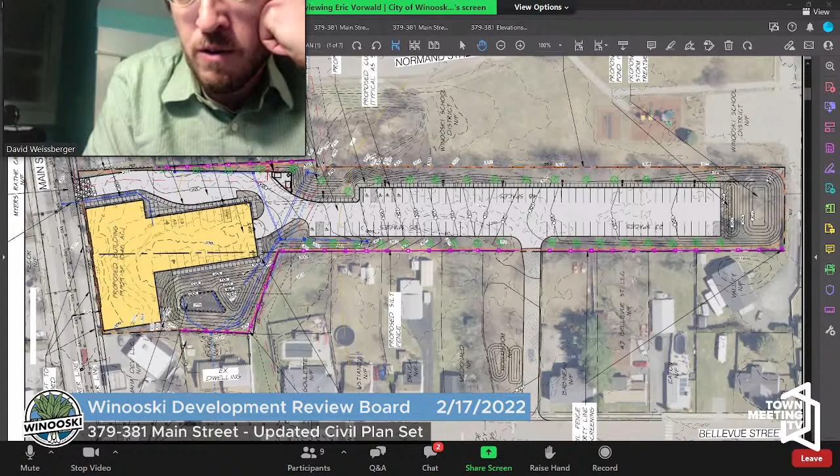To be honest, I don't recall if we put a specific detail, but it's very explicit on the plans, the call outs for a 6 foot high vinyl fence. My understanding is it'd be a 6 foot high white vinyl fence, just like you could get at Home Depot or any specialty store that sells fencing, or have it installed, but that's the intention. I believe along that southern property line our only requirement is a fence, not a wall.

Is that correct, Eric? Correct. Yeah, so that's our intention, 6 foot high white vinyl fence.

If there's any doubt in anybody's mind, we could certainly put a detail on one of the detail sheets and call out more specific if the board so insists. We'd be happy to have that conversation with you folks tonight if you find that helpful to satisfy all the neighbors' concerns.

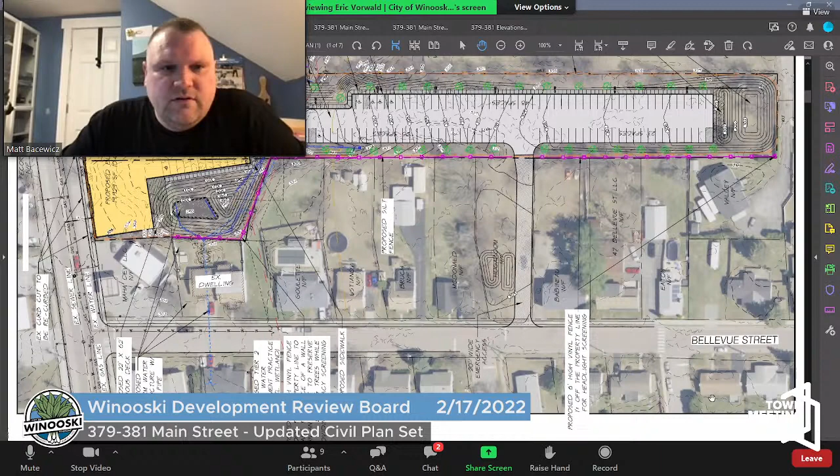Did you say you had something on paper that might offer up a better visual representation of what we're talking about? I brought views from the corridor, and I think we could hold them up to the camera. If possible, I'd like to see if we can get a copy of those entered.

Zoom in. Just hang out there. He can zoom in his camera. This camera here. You just stay where you are, Carl. Okay, I'll stay right here. You just hold him up. Okay, so this is the first excerpt that I brought.

It's really just a Google Earth image from the street perspective. I don't know if you guys, I mean, I can get closer to the camera too. Actually, let me stop my share as well, that might help. I'm going to leave these with Eric.

And what are we looking at there? The mature trees? Yes. I don't know if you can zoom in more or I can get closer, but this is really tough, this is not going to help. Okay, I can see it. So all those trees, will they all be cut down?

This is the street view for, I believe it's 53, to the right you can see the garage in the back. In perspective on the plan, we could go back and point to the plan, but visualize what that looks like, the garage in the background there.

Then we'll show you where it is on the map. So that's that one, and then we're gonna show the other side of the house right next to it, which is that one. That's the street view looking from Bellevue towards what will be the fence behind that garage, right here. On the plan view, Eric, if you would bring that back up, I'm pretty sure you can point to it, but I can guide you where those pictures show the representation from the street view.

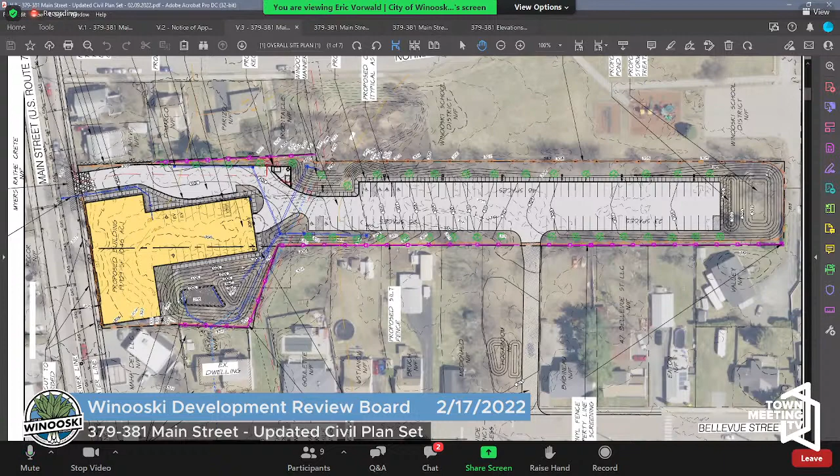For that particular property, even though he was the one concerned, I think you're not gonna see much. But for all the other properties that don't have structures that close to the property line, I think the fence will be more of a benefit, as far as lights and that kind of stuff, if that's the concern. When I spoke with Mr. Bruck, I thought he was the one most interested in the proper screening. I just wanted to bring those visual images so we could take a closer look with the board about what that's gonna look like from the street perspective and what you'd see passing by.

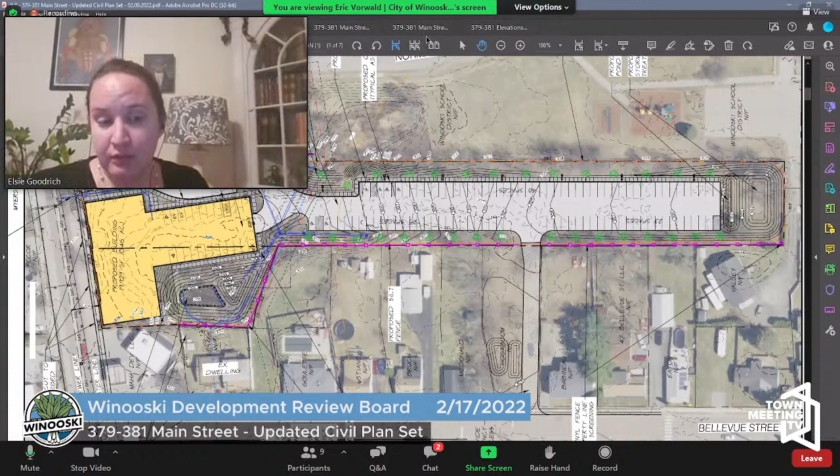So that first image that you held up with the current existing trees, is the goal for this new planting, after these trees planted behind this vinyl fence mature, to mimic what's existing there currently? The trees we're gonna propose are gonna look more like row trees because a lot of the existing stuff is kind of brushy, with no consistency of species. So in having to build a parking lot, we're gonna lose some trees, and I feel like the trees we're proposing will be a good addition to make the transition from existing to new plantings to parking lot.

Will you be keeping any trees? We're gonna keep as many trees as we can. But unfortunately, I want to do some grading, and you can see those contours on the plan. We can zoom into it, but I'm not sure if Public Works has looked at this. I'll be happy to talk about drainage, but I don't know if that's part of what I should be talking about, Eric.

We're gonna do some regrading on the property to bring all the stormwater to those two structures directly behind the building. The reason there's two structures is if one fails, there's a second one. I don't want to take any chances, I don't want anybody to get flooded. And then we're gonna put in a brand new pipe and connect that storm pipe to the existing run. The intention is to minimize any stormwater issues.

And then are those stormwater basins near the second driveway out? So if you zoom in, right behind the building, Eric, can you zoom in there? Or we could look at plan sheet 2 as well, if you want. That's a bigger perspective.

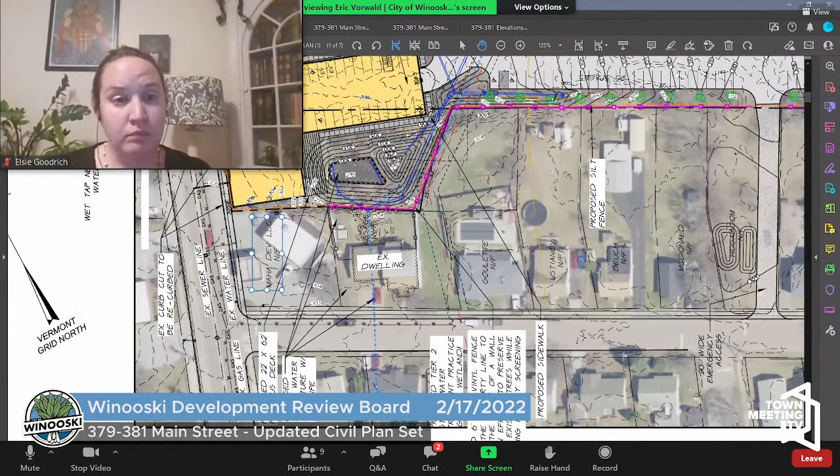So if you look on that plan where Eric's pointing, all the drainage where those two handicap spaces are, there's one basin there, and then two basins right there. That's the low spot of the site. One spot is 1 foot lower than the other basin, so if the low basin plugs, the second basin will take all the water and drain it away. That's the fail-safe.

And if that doesn't work, it would overflow because the basin trajectory that goes to that gravel wetland is lower than the owner's property. So the intention is to drain all the stormwater into that gravel wetland, and there's a structure on the bottom left corner of your screen that's the outlet mechanism to let the water back into the structure at a controlled rate, because we have to get a state stormwater permit.

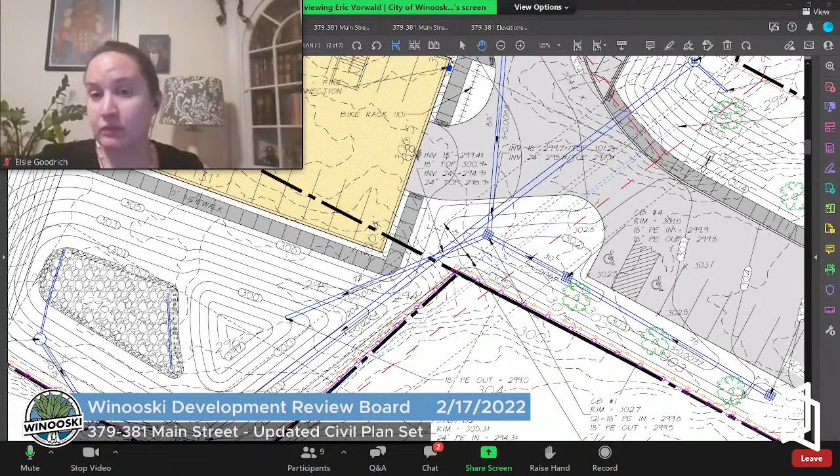Have you acquired that from the state, or is that still in the works? Because we had an appeal, and from what I understand, it's rare to see an appeal with form-based code. We were just waiting to see how this was gonna go. We haven't seen many appeals with the form-based code. Anecdotally, it's my first one, so I thought we should be prudent and see what happens.

Just to lay the cards on the table, if there's anything wrong with the plans or there are significant changes and we're already into the state, then we're going to get an amendment, which pretty much doubles the length of time and costs more money. So we want to make sure everybody's happy with the plan before we go get a state permit. That was our thinking.

The other exit out of the parking lot onto Bellevue, is there another depression there?

I spoke with all the folks on our team, and it was my opinion that because we're over an acre, we're going to have to put a stormwater feature there. So even though we're just creating a 20-foot wide access for the fire department, who asked for a second emergency access since there's a gravel surface there, we have to address stormwater as well. That's why that feature is there.

So it's a pre-treatment to a basin, and when we do our full investigation of the stormwater system, we may have to work with DPW to put an overflow. We've talked about it with Ryan Lambert, but we haven't finalized it. It's sort of a placeholder for a potential overflow or the need for one.

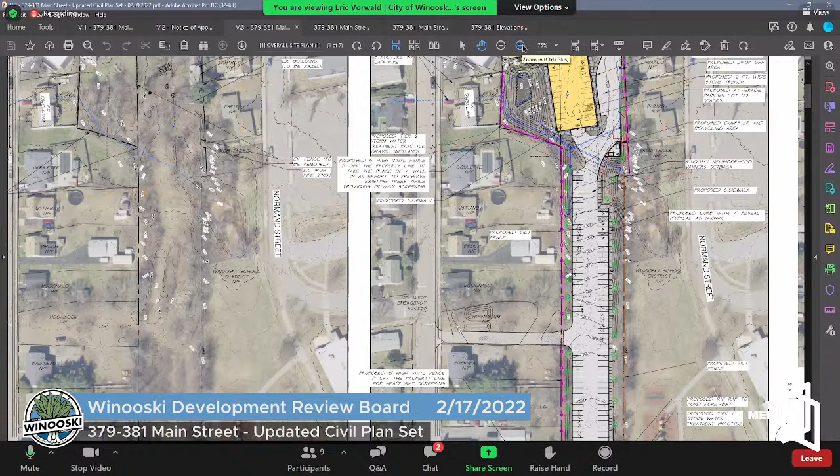So we need to do test pits. Like in March, we're going to do some test pits, finalize the stormwater, and then submit to the state. That's our intention. And is that a similar situation with the far rear of the lot? That's correct. Yeah, the gravel wetland - there's no doubt about it, we don't have to do any testing.

We know that it's kind of wet there, so we're not going to meet the 3 feet of separation. What's going to dictate system 2 and 3 is whether we have the 3 feet of separation in groundwater, and by the maps, we should - but that's why we don't go by the maps. So we're going to go dig some holes and determine the most appropriate system for those two.

And so your fence will extend the whole southern border? What about that - I guess, is that the east end there, the bottom there we're looking at? Yeah, there's a chain link fence there now with a bunch of vines and vineyards.

I don't have any pictures, but I have some in the file. We actually surveyed another property very close to this one, so we have a lot of information for that area of the corridor. I don't have it with me tonight, but let's just say that because of the stormwater features and proximity, we feel like we don't have to put a fence there because there's already a chain link fence, and it would look kind of weird since we don't own the fence. So we were just thinking, let's stop it at the corner - that was sort of our thought process there.

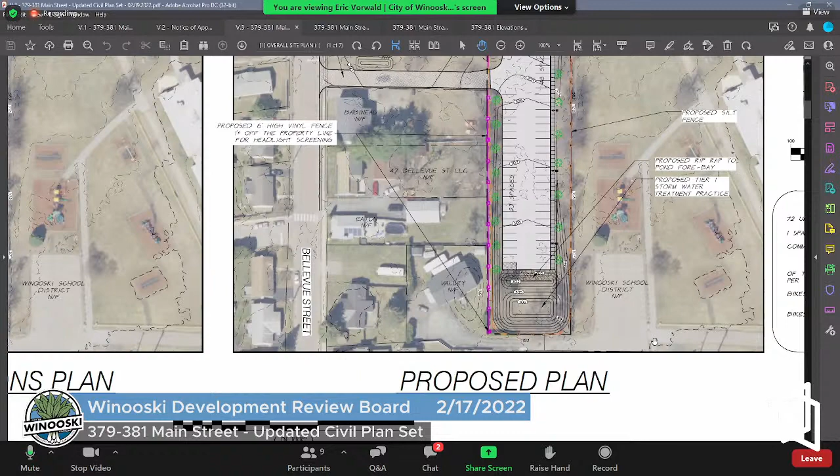And your neighbor to the north is the school district? Yep. Is anyone from the school district here this evening? Was the school district involved in any of the talks? They were notified of all the meetings. I don't know if you guys want to know this, board, but I spoke with their engineer from EV.

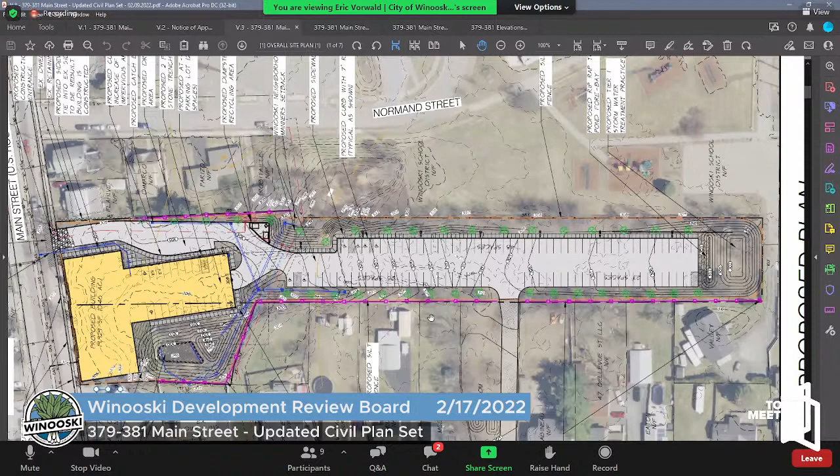And I asked for information about their stormwater system draining onto our property, and he wasn't very forthcoming - a little abrasive. He said things I didn't like, so I said something to the effect of, well, maybe we could just close that storm pipe off then. And he goes, well, you can't do that. And it's like, well, it's our property. So we're fixing a problem that we feel isn't ours, but we're volunteering to fix it in an effort to allow this project to move forward.

Is there a storm pipe from the school's property onto this property? The best way to see it is - Eric, just scroll up and look at the existing conditions. I don't want to get too far into the proverbial cattails here - no stormwater, pun intended. But on the existing conditions plan there's a lighter blue shade line, it's a little hard to see.

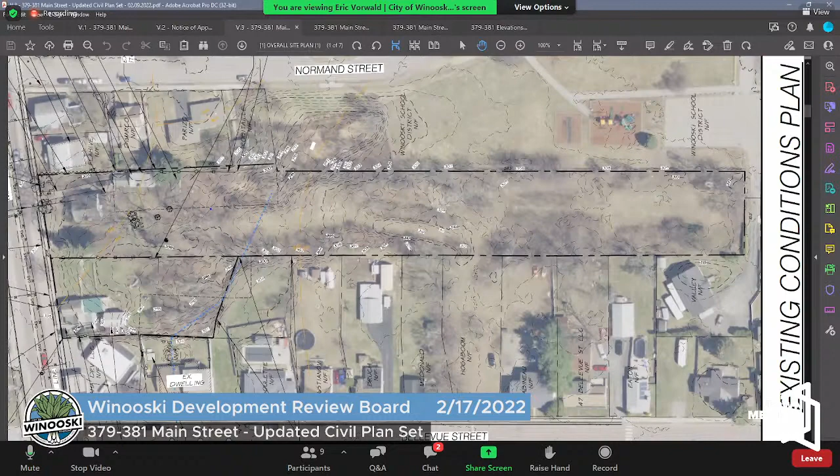But there's an existing pipe that goes through that garage - follow Eric's cursor - and we have locations on that blue pipe that goes all the way up towards Normand Street there. It goes through that garage? It does, yeah, not ideal. Hopefully there's no drain pipe in there. We've talked to the owner, and he said there's no settlement issues and he's not overly concerned, but part of our solution is to line that pipe and fix it, so the city has more control over where that stormwater goes from here forward after the project's completed. And that pipe flows south. Correct.

Project South, yeah. Looking at that plan, we're kind of like north like this. Well, Eric's got it.

That's the perfect orientation for visual purposes.

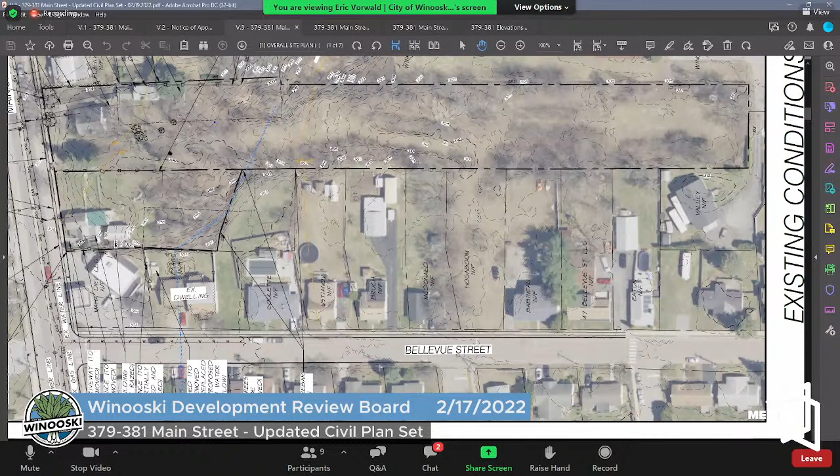On sheet 2, I think you've got a note that is in conflict with what you're saying. The existing storm line in disrepair to be abandoned, pointing to that line. There might be a miscellaneous note on there, because what happened is, well, the short version is we were gonna reroute the stormwater around his house, then he decided he didn't want to tear up his yard, so we're actually gonna do it from structure to structure. That structure right there shouldn't be there, should have been erased, that's a mistake. But we're gonna line that pipe that goes through his garage and basically restore it to new condition, or as best as we can, so that it's usable.

So the long-winded write-up that we wrote back to the city of Winooski was to explore slip lining, spray coating, or any fashion that, after investigation, would be the best solution to fix that existing storm pipe right there. Because I don't think we should put an easement and put the burden on the city of Winooski, and I think they would have been okay with it if it wasn't through Mr. Lesage's garage, but that's the kind of discussion we had with the city and the public works. So we left the easement starting at the back, and we're just gonna repair the existing pipe, and everything from there forward in blue is gonna be brand new.

So if there's a miscellaneous or erroneous note there, we'd be happy to make that change, because these changes happen pretty rapidly to get it to Eric for the 10th. So I was kind of rushing to get these plans modified to make that change.

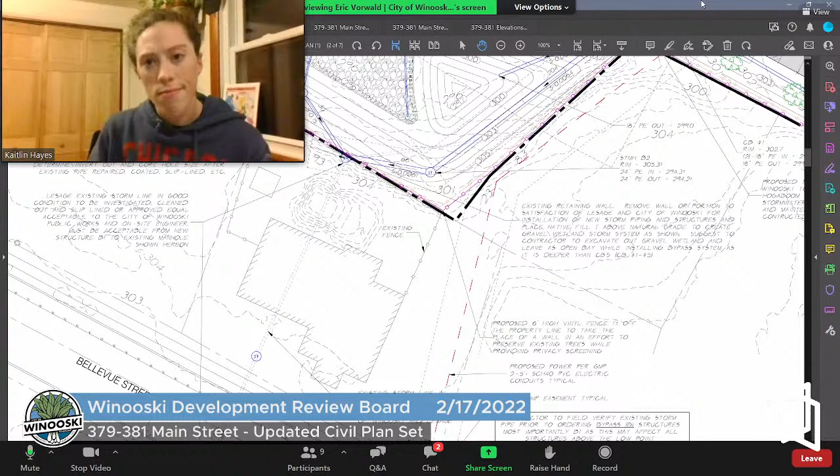I'll give you my answer, if that's okay, Eric. That species, we work with Gardener's Supply, a local supplier, and they say it's hardy, zone 4. There's a lot of good things going for that type of tree. It's very hardy, salt tolerant, resists cold. So every time I do a project, I consult with a local supplier, predominantly because a lot of towns accept Gardener's Supply's design and we work with them. In this case, I consulted with them because we did another project on Main Street and chose the same species, and they recommended it for this site based on the soils we showed them on the map.

Okay, yeah, thanks, I was just curious about that. Excellent, any other questions from the board? I have just one other.

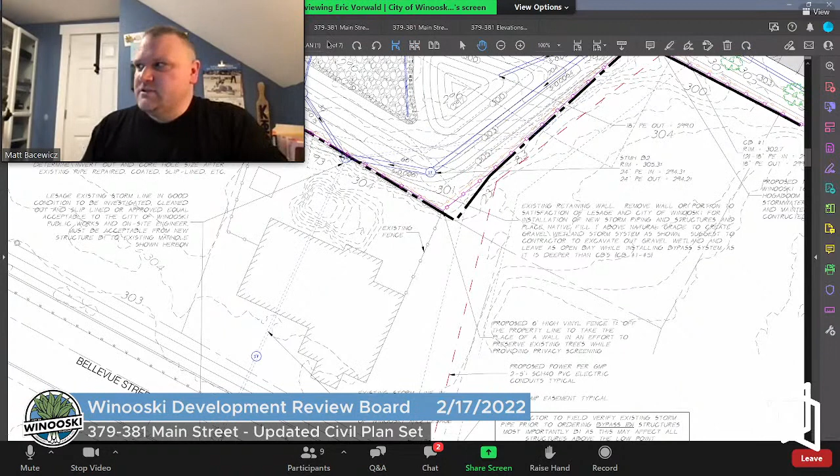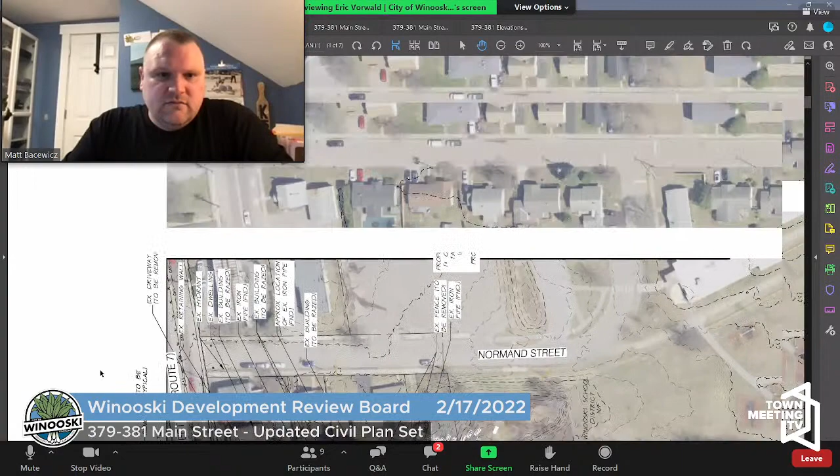My question, getting back to the fencing, which is what this appeal is primarily about: the north border along Normand has several houses. I did see a purple line adjacent to those. Is it safe to assume you're planning the exact same fence? Yes, we're going to do a 6-foot vinyl fence. It matches the legend, and that's our intention, to meet the neighborhood manner with a 6-foot vinyl fence. There's an existing retaining wall there now, so we're going to go right against that.

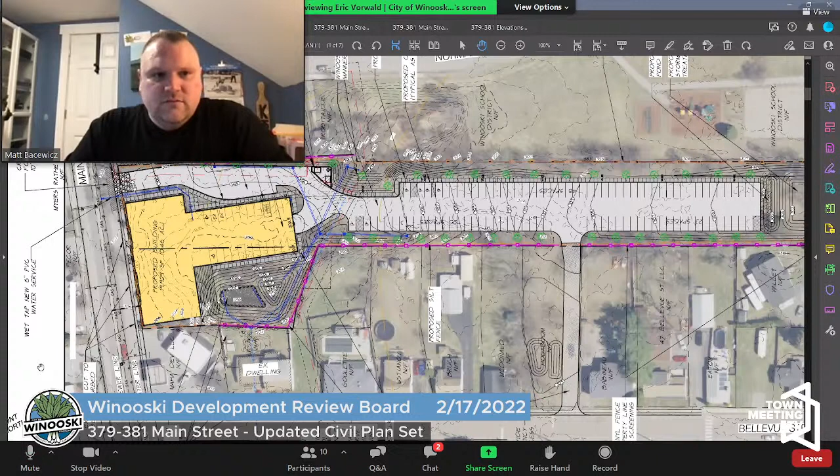I have one question. Go for it, Dave. What in general is the relation of the new parking lot to the houses, say on Bellevue? I don't see many grades down there. Is it pretty flat, or is it up higher?

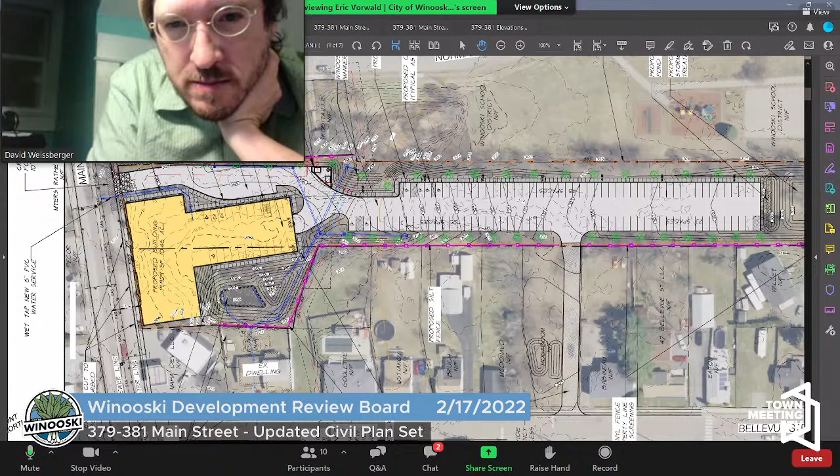Actually, the location you're referring to, on the Bellevue property, there's grading that basically hits the existing grading almost immediately. All the way down through that corridor it's just slightly higher, then drains and ties in to create a swale to those three catch basins. On the other side, we're draining all the storm water towards the easterly feature, so all the grading is east-west. From where you're looking at it, you can tell by the grading it's all right to left, or all right or all left -- the high point starts at the emergency access and goes either direction.

So it looks like the whole site is sloping up to the east. We're trying to create a high point. I can't see my grades, but just from doing it, it's almost slightly left there, where there looks like a V shape, I believe. Eric, yeah, you can see that V shape -- that's the high point. Right, a little bit more right, sorry, yeah, right there. That's the V shape, those two contours are the high point.

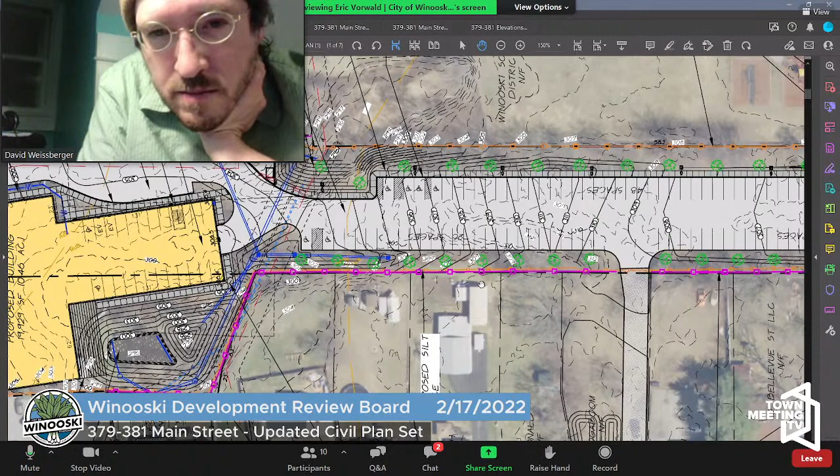The emergency access road -- residents cannot use that normally? Our understanding is it's for emergency access only. And how do you control that? I'm not sure if that was really asked of us. Eric, were we asked how we're going to control that? No, that's okay, the fire department did ask for a second access. I believe the certificate of conformity, which should be in your agenda packet, does indicate an emergency access that is regulated per whatever the fire department is looking for.

So the intent is not for that to be used by the residents. There'll be a gate or something, maybe -- that's the expectation, yes. Whatever that is will be discussed with the fire department so they can get in as needed, and so the adjoiners don't have traffic ripping through there. Not that anyone would rip, but they would drive through there.

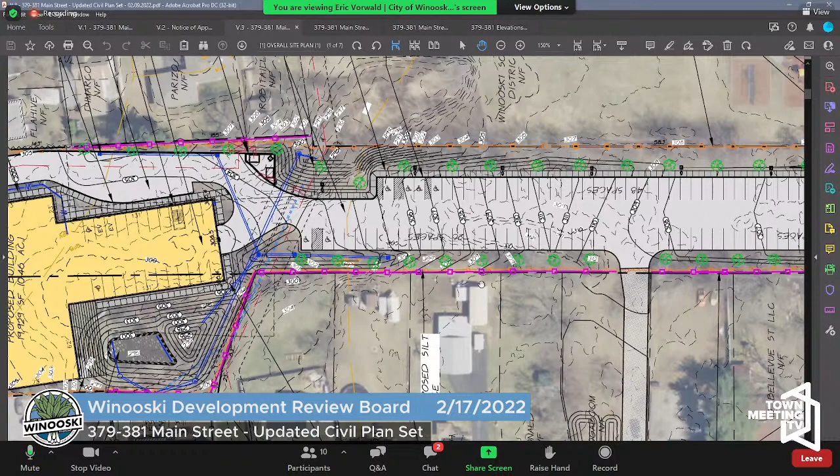You should live on Bellevue Street. Yeah, they would rip through there, is what you're saying. It doesn't just happen on Bellevue -- people rip everywhere. That's a discussion for another evening.

So obviously this appeal is primarily about the privacy screening, the fencing, and the request for a design before that goes to the approval process. Keeping in line with that, if there are no other questions about that, I believe we can probably talk to the appellant if there are no other questions for Carl.